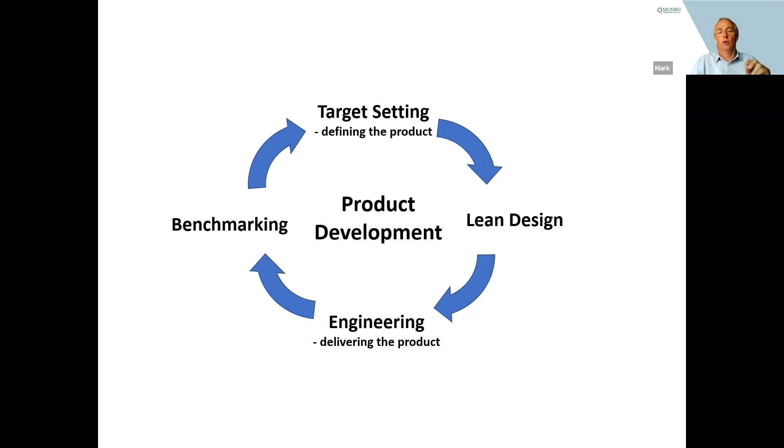So I like to think that lean design and benchmarking contribute to better forms of both. It's very important that we see these as part of the integrated activity for engineering and product development. The lean design aspect, in whatever form you take it, and the benchmarking, however you do it, are very important to being successful product development companies.

There's lots of influences on how you might do both - outside influences and internal influences that mean you're better or find it harder to achieve these things. For benchmarking, obviously availability of competitor products is sometimes an issue. And I think in one of our last sessions, we talked about how low volume, high cost products like jet engines and things like that are fairly hard to benchmark because there's no availability to you as a benchmarking agent.

So the thing to remember in this kind of environment is that you can benchmark other industries, looking for other technologies and other materials that can help you. You may not directly look at your competition, but you can look at the engineering environment to help you produce a better product.

So the thing to remember out of this is what you're going to get out of benchmarking. You're looking for knowledge and understanding. It's not copying, it's knowledge and understanding, because you have to know how to apply the information that you develop. And lean design is about an elegant design and a profitable business case.

An elegant design can be anything really, but it's how the design fits the business. So we might be talking less about style and how good it looks, and more about how easy it is to produce, how many parts are in the product, and what effect it has in the factory. Is it easy to put together? Those kind of things. And then over that is, can you turn a profit on the product you're manufacturing?

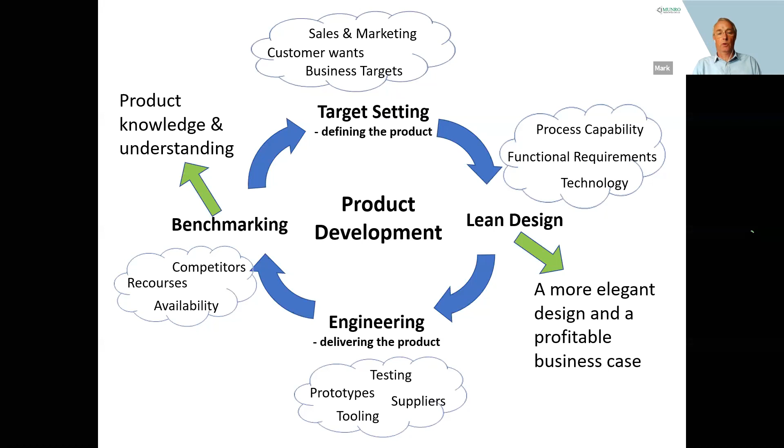So this is trying to set the scene for you where benchmarking and lean design fits in a product development company. So benchmarking is really about understanding your relative position to your competition. It lets you know where you are and how competitive you are, not just in terms of how many sales you have, but how many parts you use, what technologies you use, those kind of things, how you're manufacturing.

This then allows you to identify targets for your new product development. You must know where you're going to. I find I'm in a company where the engineers don't have defined targets for their own system. There might be, say, if we're in automotive, a vehicle level target for weight, but there's no engine specific weight target. So it's very important that you give engineers a target to develop to.

Benchmarking also helps you find new processes and new materials. And as I said, it's often beneficial to look outside of your own industry for those things.

It also helps you understand the business case of the competition. Quite often we find that you're competing with a competitor who may be a larger organization. And if you follow what they do, you'll end up in trouble, because maybe they have high levels of vertical integration in their business, which means they can use products from other business units to support their delivery, things that you can't do. So you have to understand what other people are doing and then find a way to compete.

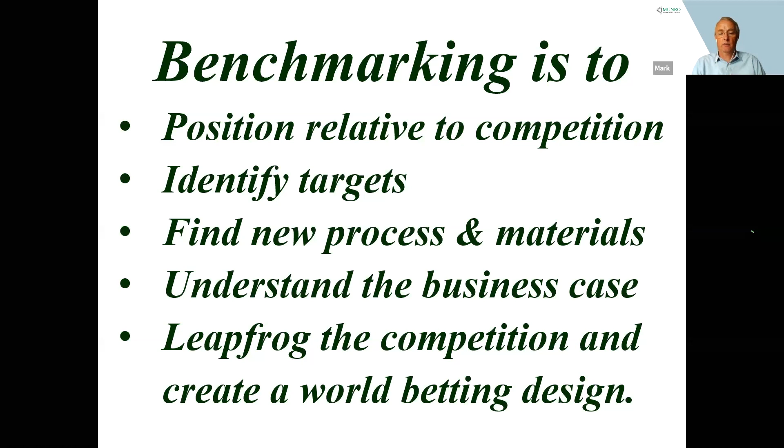So benchmarking, as I've said, is understanding and preparation for innovation. This is what I really like to get. You can't just look and copy. You have to look and innovate. That's how you challenge the marketplace.

Benchmarking, of course, is also the detail of taking a product to pieces. And the thing to note here is, if you can, you need to get hands-on knowledge to truly understand. So we always work to try and get the engineering team to do the disassembly wherever possible. Sometimes it's a secondary department that does it, but it's always good to get engineers into the benchmarking and teardown center to do their own investigation of products.

And finally, you must disseminate the information. It's no good writing a report if nobody sees it. So you have to find ways of getting the teardown benchmarking information into the hands of the engineers. And I've said the best way is to get them to do the job. Other than that, you must actively go out and push the information to your engineering teams. And that's helped by having better targets, because if they're under pressure to deliver on a target, they will often look for different ways of doing it.

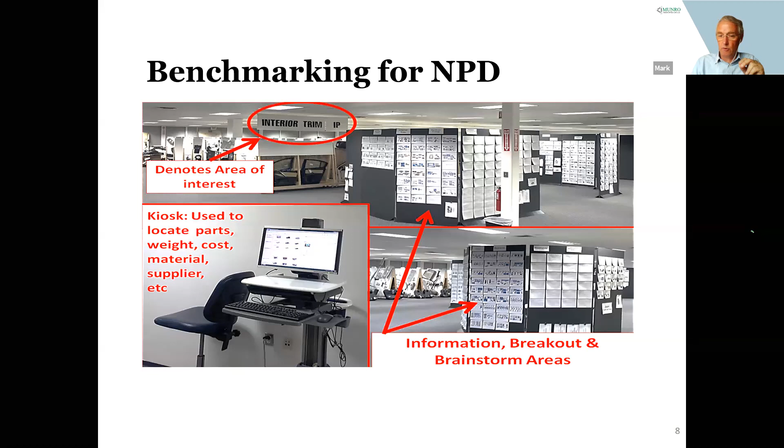So that's benchmarking, the key features that you really need to implement if you're going to be successful and use the benchmarking ideas and tools to their best effect. One of the things I wanted to illustrate, a long time ago now, we did a study on a Toyota Matrix, and it was interesting at its time, but the example I wanted to give you tonight was the fact that we looked at how many fasteners they had in the car.

Something you may not look at when you approach a vehicle and you're looking for technology, but it's an important measure in terms of engineering. It's an important measure in terms of business, because of all the effects it has on manufacturing, in terms of just tightening bolts, just looking at it, simple as that.

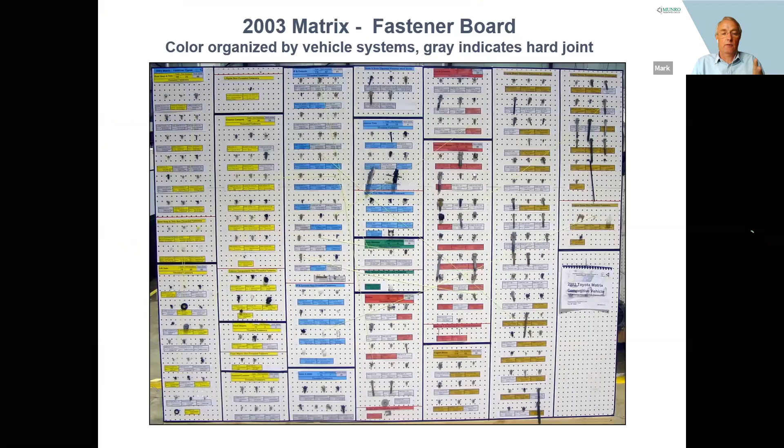So we set up these boards. We pinned every fastener we found to a board and checked it wasn't duplicated elsewhere. What we found is almost 1,000 fasteners in this car for the major components. But an interesting fact is there are 270 different types of fastener, so very little commonality across fastener types, and a lot of individual fasteners. If you notice the lift gate, there are 24 different types of fastener, and 21 of those 24 are unique - one-off to that particular system.

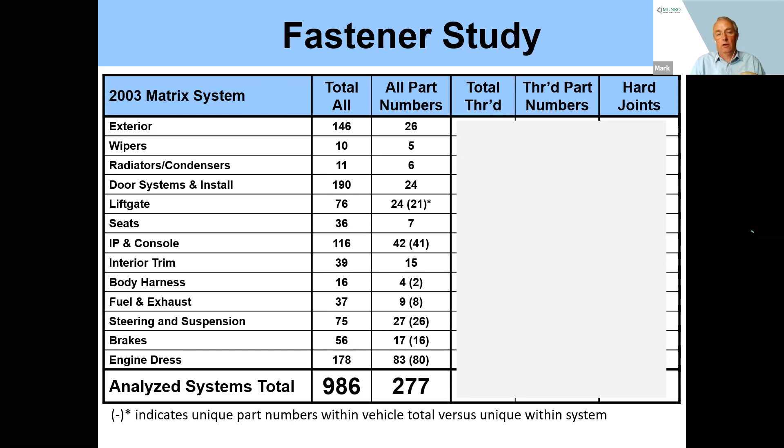So how is that? Is that good engineering or poor engineering? For my mind, it's something that can be improved. You may see a different side of it. I wanted to point out what we thought was the learning point from this, and what I still take as the learning point.

Toyota buys quality fasteners. Each one of those items was properly made and without fault - a quality bolt, if you like. The other thing to note is they are very, very good at adhering to process standards. So each bolt, when torque tightened, is all tightened to the same level and degree - very high adherence to process capability there.

The bad point, as I've just made, is a variety of fasteners, a big variety, and a lot of individual fasteners in the count. That's the good and the bad. The learning point is Toyota is very, very good at some things, but they can still improve. Just imagine how powerful it would be if they could get control of the variety and number of fasteners on their product.

So I wanted to say, looking at fasteners at the very bottom of the pyramid, in terms of benchmarking, very specific notes I've given you in there. I wanted, if I can, to just try and illustrate that with a couple of minutes from a video.

I think some people are aware that Sandy Munro, the founder of our company, does a lot of videos explaining our teardown activities, what's going on. I wanted to pick a couple of minutes out of this just to allow you to see how that goes, but I wanted to take it to a much higher level. So it's okay to look at fasteners and gather numbers on that, but at some point you have to bring the engineering activity up to a system level so that you understand how saving fasteners and changing the design actually works.

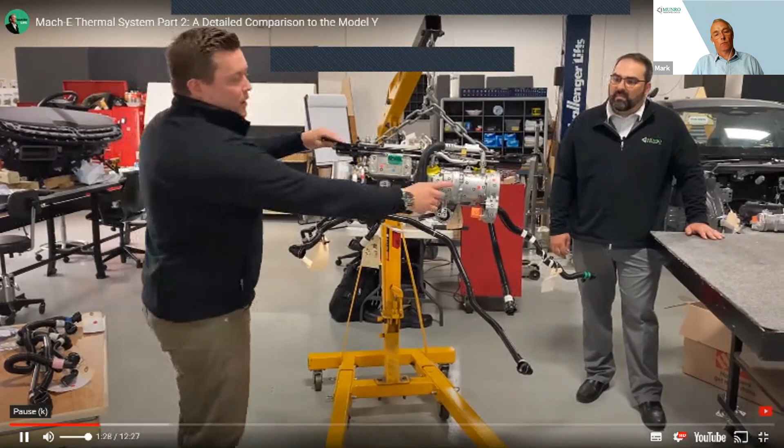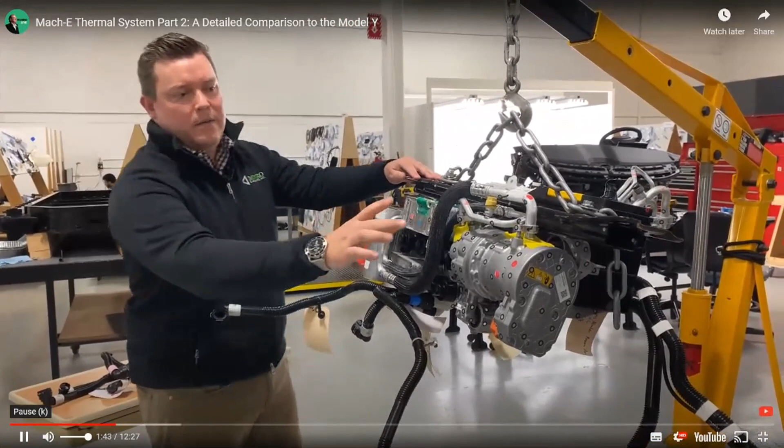So this is the Tesla Model Y thermal system, which is a unit we benchmarked a while ago. It's interesting to compare that with the newly introduced Ford Mach-E, the same system, the thermal system. Bring the corresponding pieces and parts that we found on the Mach-E, put them on the table, and then compare and contrast the hoses and lines that run between them. Right here is the R1234YF pump - notice it's hanging off of this cross-car bracket from the Tesla Model Y. Tesla chose a steel bracket to go across, Ford chose an aluminum one. But as we look at how things are mounted, how they're isolated, and the distances apart, we can see that Tesla focused heavily on getting everything as close together as possible.

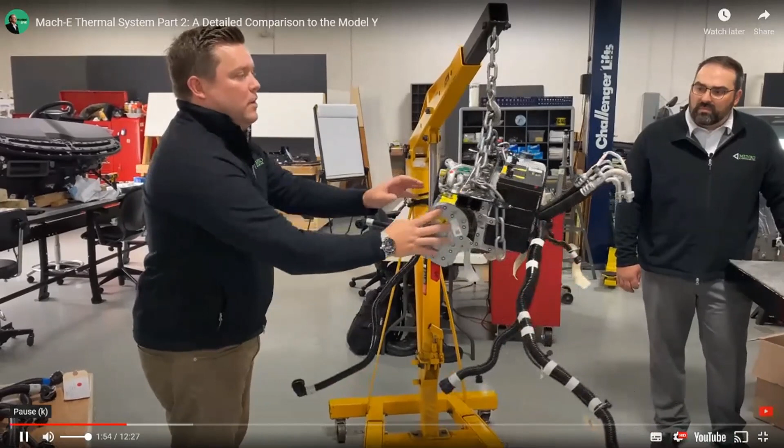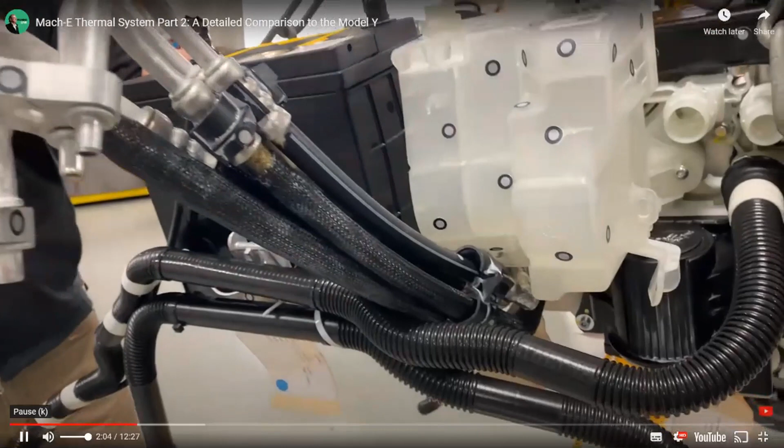If you look at the back, because this is a heat pump system, the lines run in an exact straight line. When comparing and contrasting to the Ford Mustang Mach-E, you'll notice that the lines are not nearly as concise.

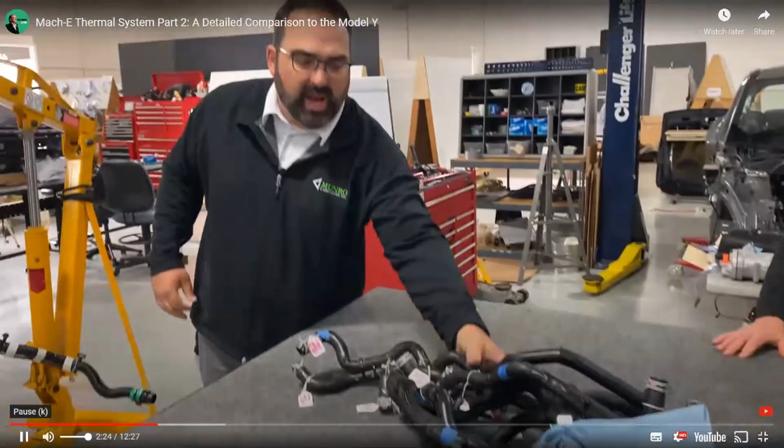So Ben, do you want to go ahead and grab the first component to compare, and we can talk through the differences? All right, well, first we're going to grab all the lines that the Mach-E has, which is, as you can see, a whole bunch of lines when compared to what the Tesla Model Y had. There's actually 35 different hoses here, which is a very large number when looking at the thermal system.

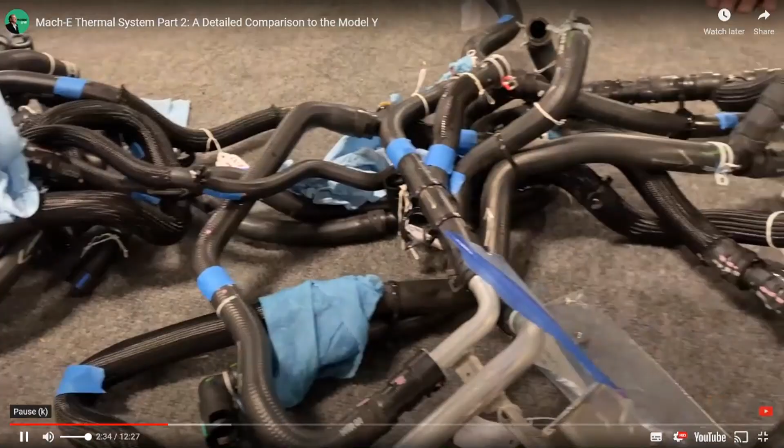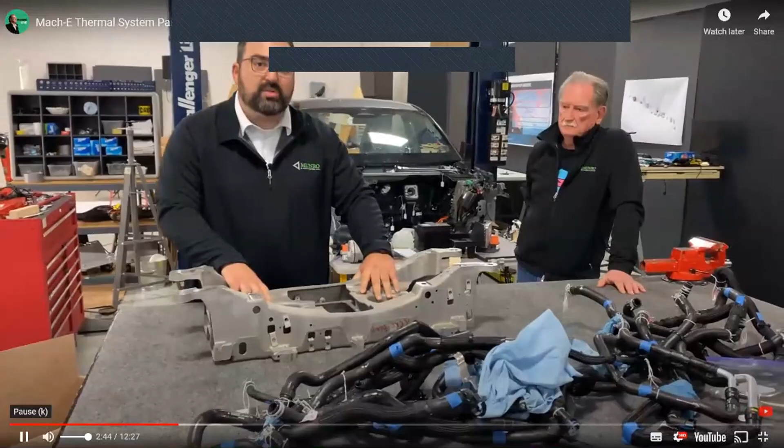And then pulling out a few of the other parts that Corey had just talked about, we'll start with the bracket that they're using for mounting most of this. This is the crosscar beam. This also holds the motor up as well as the electronics. So Ford is doing more than just the thermal systems with this component.

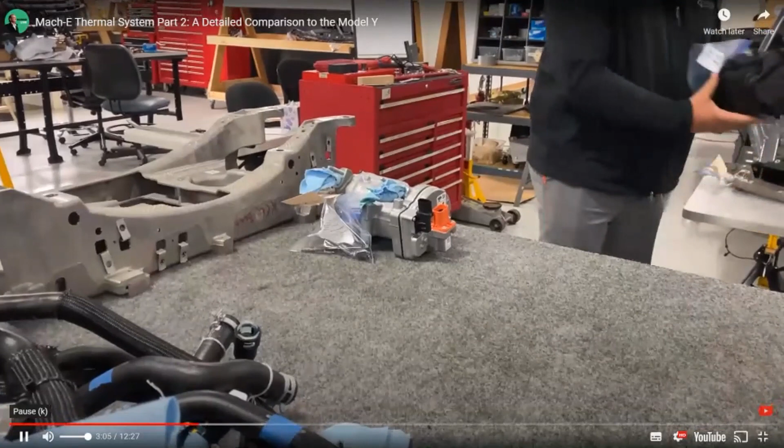So it is much larger than what it needs to be, but it would be the equivalent part in the Mach-E. And then we also have the compressor that the Mach-E is using, but it's not mounted just like that. There is a noise isolating diaper that goes around it, and they have a bracket and then an isolator to hold it in place. So there's a lot more that's happening with these parts.

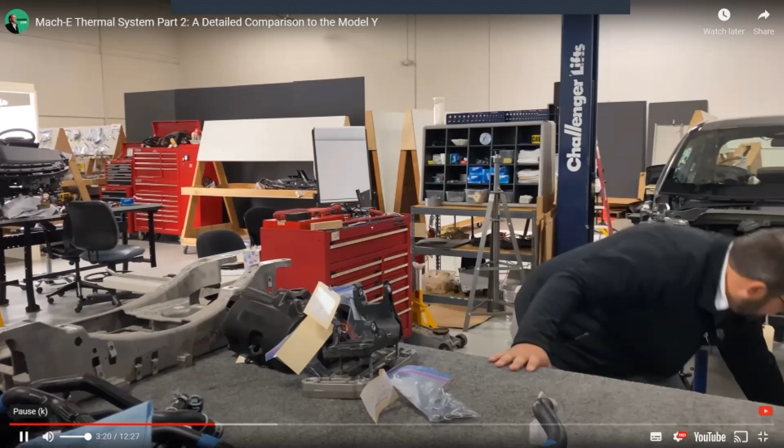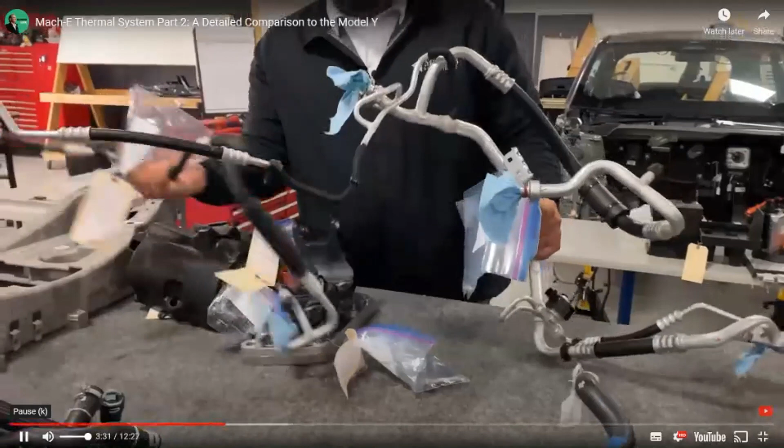And then Corey also mentioned the refrigerant lines there and how they were very straight and to the point with their design. These are very turned, they're very bent, not a straight line ran here, so they have to wrap around parts to get to where they need to be.

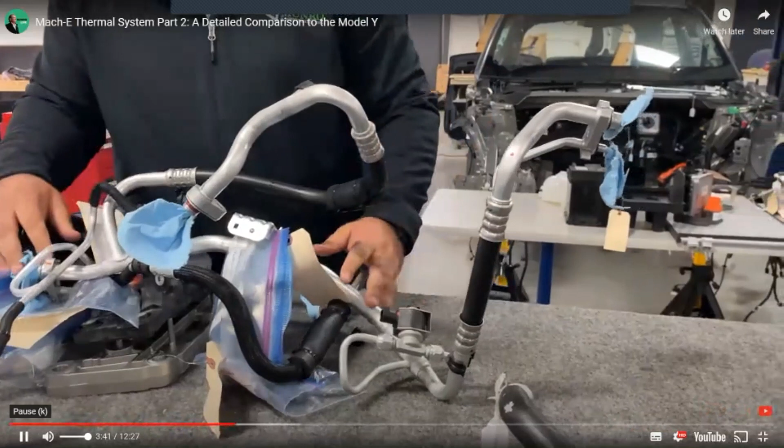I'm hoping I'm picking the right screen. Here we go. So hopefully I'm back to the presentation for everyone. Yeah, yes, Mark. So, yeah.

Thank you. So that's an illustration of how when you do the benchmarking across systems, you can see immediate difference between the Tesla and the Ford. Why they ended up like that is open to speculation, but it's probably because Ford didn't look at the Tesla system in terms of benchmarking, and they looked at other systems.

When we've noted between vehicles like the Tesla and the Ford Mach-E, some areas are truly fantastic on each car, but nobody does everything really well. And so it's important to note that Ford was still designing here a distributed system across the car when Tesla had already shown another way of doing it.

So interesting point, but just to get you, there's the Tesla system. And here's everything that was equivalent on the Ford Mach-E. Now, you might say, well, Ford had to live with other constraints, maybe different sets of suppliers who did something. Maybe they were carrying over a lot of parts and wanted to reuse those from their parts supply bin, that kind of thing.

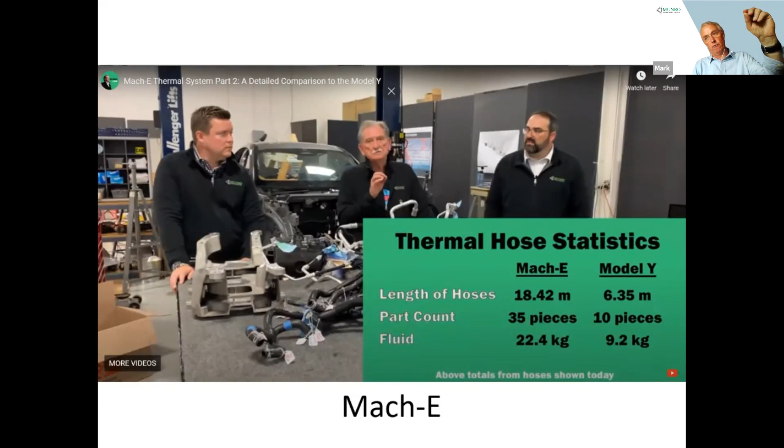So you're having a detrimental effect. And if every system is like that, then you start to see a vast deterioration in range on the vehicle. And that's something the customer doesn't like. So, the weight here, whether it be the weight of the fluid or the weight of the parts or the number of brackets, is a very important thing to understand when you're benchmarking. So we go from the detail right to the high level of vehicle target setting in that regard.

So switching to lean design, how does this play together? Lean design is about changing the rules, changing the engineer's mindset. You want the engineer to think a bit differently, to see a bit differently about the design, and also to implement a different design. In my experience, within a company the engineer gets constrained by faster delivery times and things like that, and reusing supplier parts.

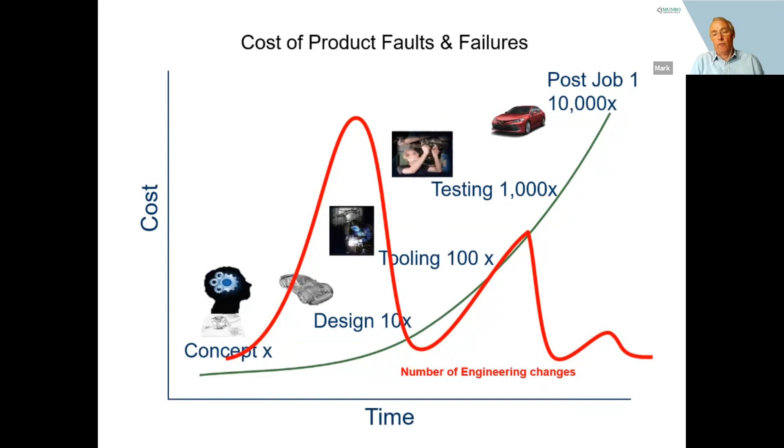And then it'll ramp up quite significantly when we get to testing and we find test failures or parts that don't fit and things like that. Then it drops off again, and hopefully we don't see it, but sometimes you do. You see failures in the field with the customer, and that's really expensive. So this is an important thing to note, where the failures are occurring.

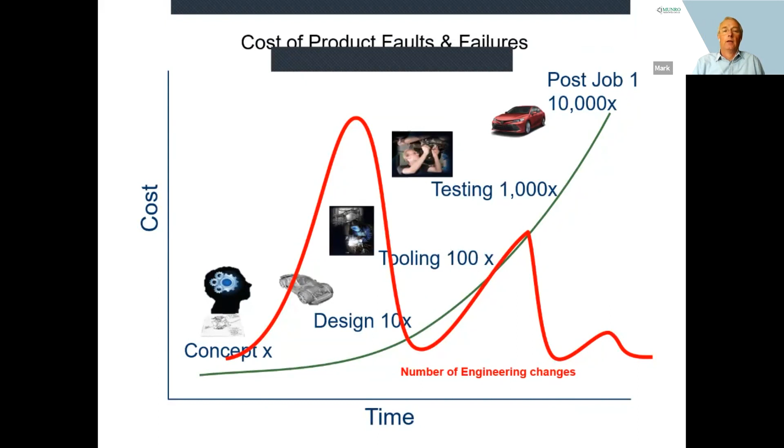The question we should be asking is when can product design be most influential on this? That is, how can we reduce the number of failures we've got? And it's fairly obvious to say that this is early in the design phase. The earlier we can get in and fix those problems, the better off we're doing. But actually, you're only fixing problems that cost you money downstream. You're not actually changing the business case of the product necessarily.

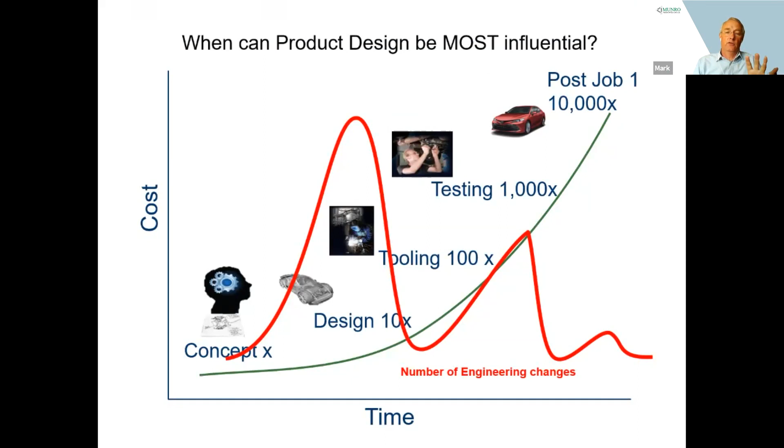This is where lean design differs in some respect, because actually lean design is influencing the profit you make, not just taking away failures, but influencing how much money you're going to make on a product. This is where we talk about the influence of the product design engineer, not the fact that we're maybe working with suppliers to reduce cost, or working with labor, or changing the factory to reduce cost. It's how the engineer influences all the downstream costs in the process through the decisions that they make.

If we can make the engineer make better decisions, more business orientated decisions, then we're really going to make money on a product, and not just have what I typically see as a very functional product, one that does the job but doesn't necessarily fit the business case or deliver the targets.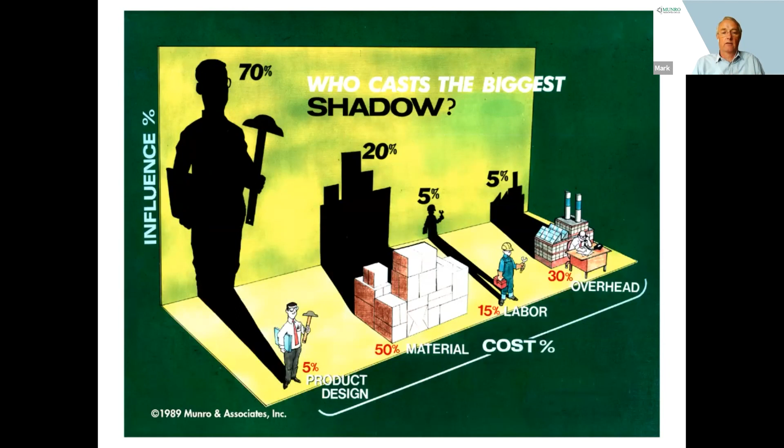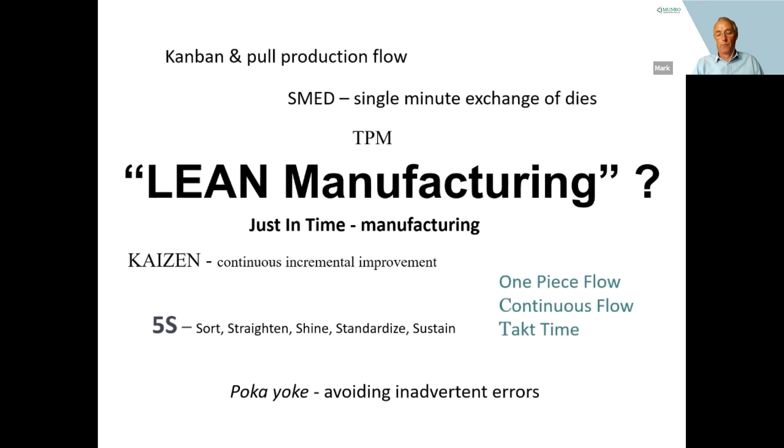So everybody knows about lean manufacturing today. It's well instigated in manufacturing businesses. And there's lots of processes that you can implement and tools and techniques that you can use to deliver lean manufacturing. But one of the important things is waste. Lean is all about the reduction of waste from a system.

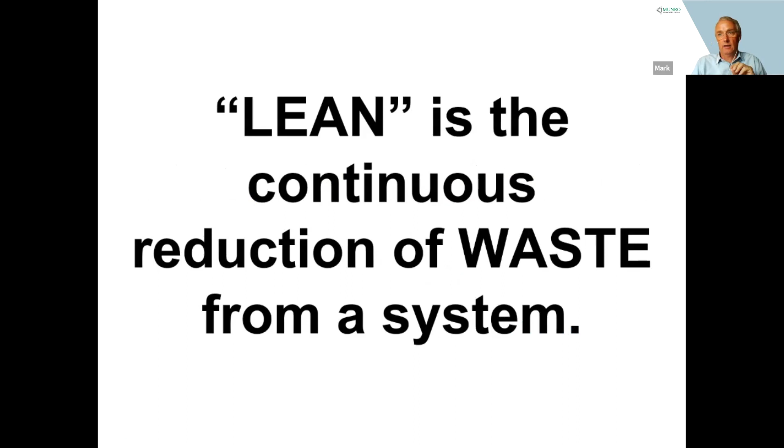So I've been thinking and constantly trying to refine the idea: what's waste in terms of lean design? In engineering terms, where's the waste in what the engineer does? And I've been thinking about this. So the first couple, very closely associated: over-specification of requirements, tight tolerances, and extra processes for manufacturing. If there are things you can do to refine that, then of course you're making a better business case.

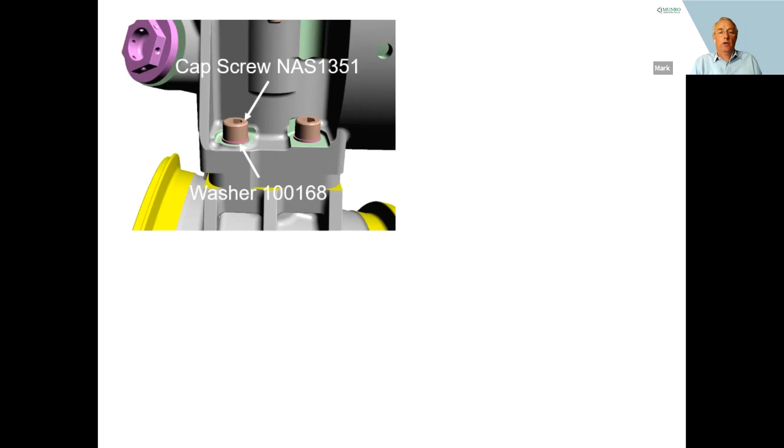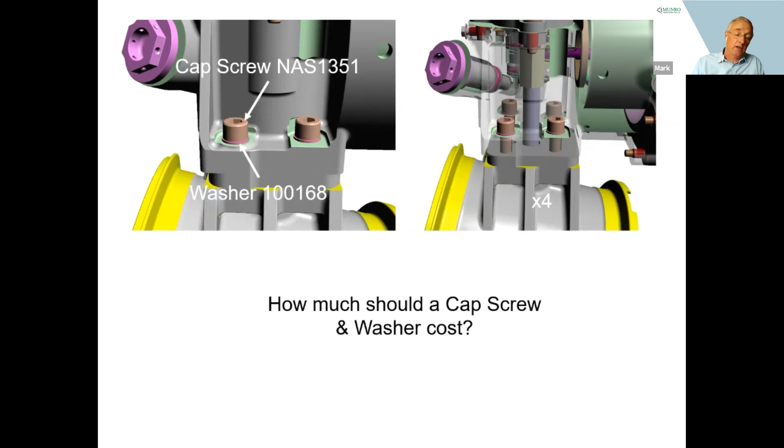Just a very simple example. Here's a cap screw and a washer. They're quite innocent parts, there's no particular science about using it, we're just trying to bolt two parts together. Actually, there's 4 parts in here, and you have to say that's fine, that's standard engineering. How much would you expect the cap screw and the washer to cost? And until you start saying, well, it's functional, but how much is it costing my product? This is when we start to open our eyes.

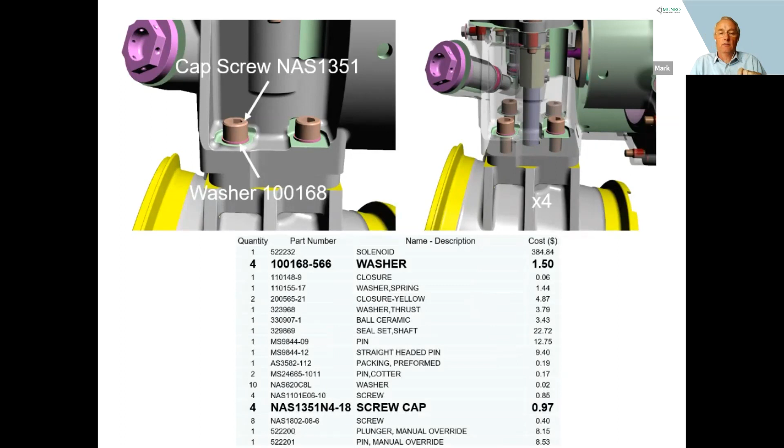And you see here that the washer costs $1.50 and the cap screw costs 97 cents. Not very standard prices for relatively standard parts. When we get into it, the cap screw is a fairly standard part, but it's for the industry, it's a fairly high strength bolt.

The washer is the interesting bit because it's actually specified to 4 decimal places of flatness or thickness. So it's a really highly constrained part. That's where the money comes from. It's probably got ground surfaces on both sides, totally unnecessary for the requirement of the job it's doing.

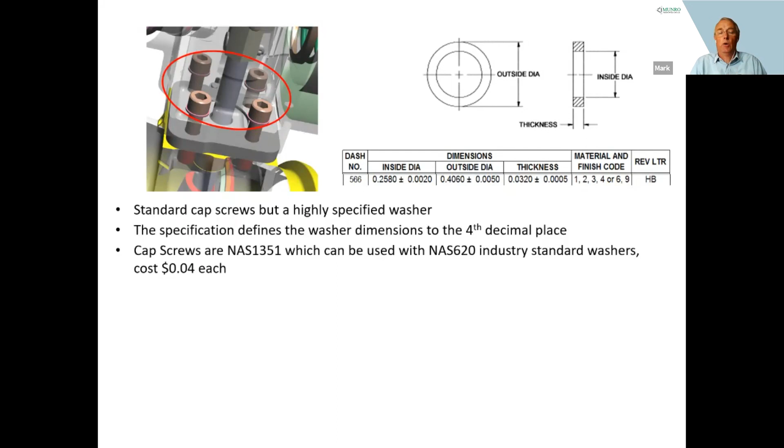And there's a simple saving here. You may say, well Mark, that's very detailed, but it's only saving $5 on a $1,500, $2,000 piece of kit. Well, you have to look at the detail to start building up. And you ask yourself, why does the engineer use such an expensive bit? It's generally because it's standard or it's been used before in their industry.

So you have to shine a light. You have to ask the engineer to think differently about the job that washer's doing and what its requirements were. There's no particular flatness on the casting surface that's machined, and there's no particular flatness under the head of the bolt. So why would you put such a highly specified part in there when a cheaper one would do? That's over-specification of tolerances and requirements there.

There's other things like long supply chains. I've met several components that have done 24,000 miles before they've actually hit the assembly line in terms of being prepared and machined and manufactured. Is there an opportunity to reduce that sort of thing?

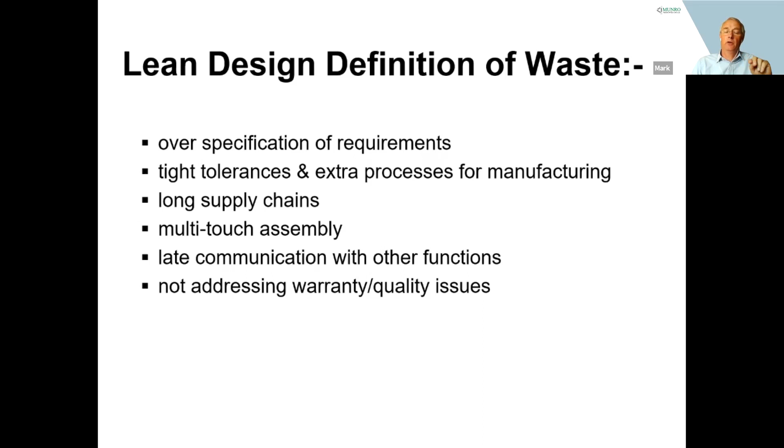Multi-touch assembly, where parts are assembled and then disassembled and touched again - I'm sure you're very familiar with that kind of thing. Late communication between functions, poor communication between functions, often costs you a lot of money.

One of the worst things I see, or one of the most obvious things I see, is quality and warranty issues. Just because that information isn't fed back to the engineering team, I see that faults and failures occur in every introduction of the new product. It's always there because the information is not fed back to the beginning of the loop. So these are forms of waste as I see it.

There's 2 more that I wanted to illustrate: unnecessary parts and stifled innovation - waste of the human mind, if you like.

Here's a very obvious change. Unnecessary parts on the left, a refined design, shall we say, on the right. It's easy to see how you could make that change and come up with a suitable product. The problem is if you didn't implement it.

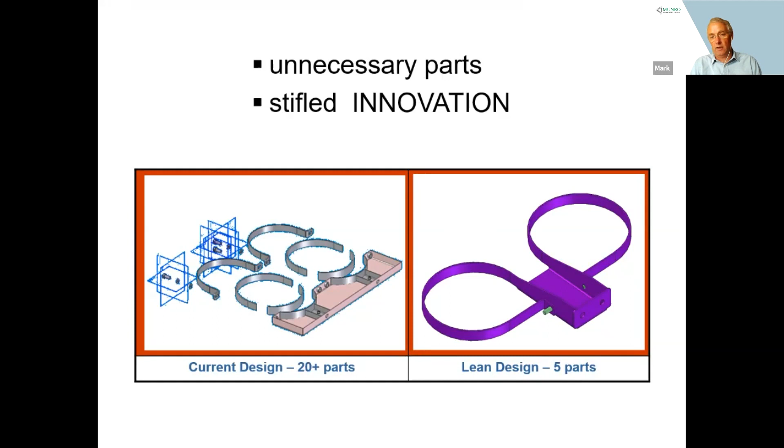And this is a catch-all to all management: if you're going to do some lean design, use the outcome of that product. It's a source of dismay to me if we have an engineering team working hard to come up with new designs if they don't get implemented. So a word of warning to some.

So we train the engineers and we do workshops on site mainly. We've been doing some web-based activities to try and work through the pandemic. It's very hard when you work with distributed teams that may go all the way from Europe to the far side of America and that kind of thing.

So it's hard work, but we train in the lean design process and we deliver workshops to make sure the engineers are doing the right thing on a product. It takes 1 or 2 goes at this before the engineers are self-motivated and doing their own lean design on the product. So I'm training the engineers to think about things differently.

And I want them to understand that they are the ones that create profitable products. So it's not just a functioning product they have to do, but they have to use the targets that have been set to create a product that delivers for the customer and one that also delivers for the business in terms of its business case.

Just mentioned working to targets. Those targets have to be detailed and specific to all the engineering teams, not just at a platform level or a whole product level. They have to be broken down so that specific engineers know they have a task. Otherwise, the engineering community tends to pass those tasks around and they never get delivered on.

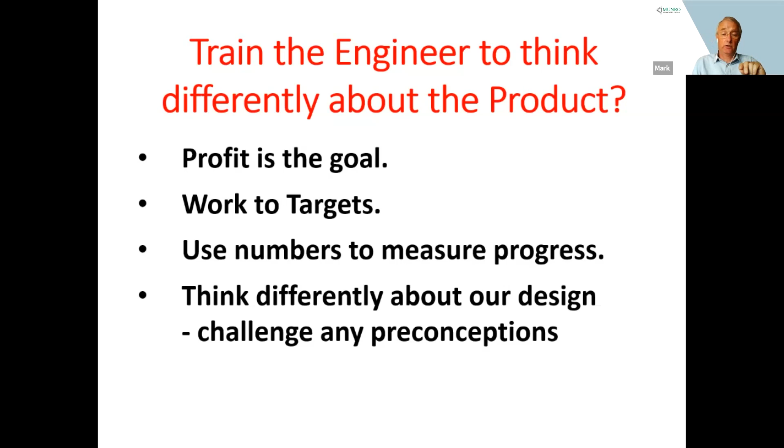Those kind of things all come into play, so numbers prove a case. Think differently about the design, challenge your preconceptions. The conceptions I find are often out of date rules and regulations, or unsubstantiated evidence about customer requirements and things like that. So always make sure that when the design is in a lean design environment, we're operating to the latest information on requirements, and we're always looking to find the waste in the design. That's the key to doing this.

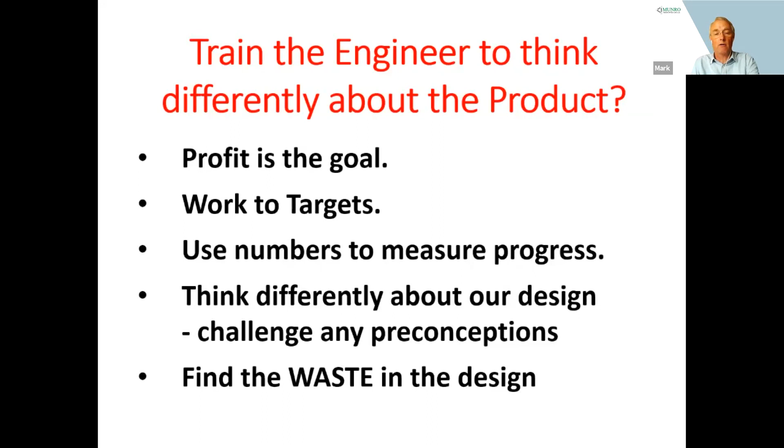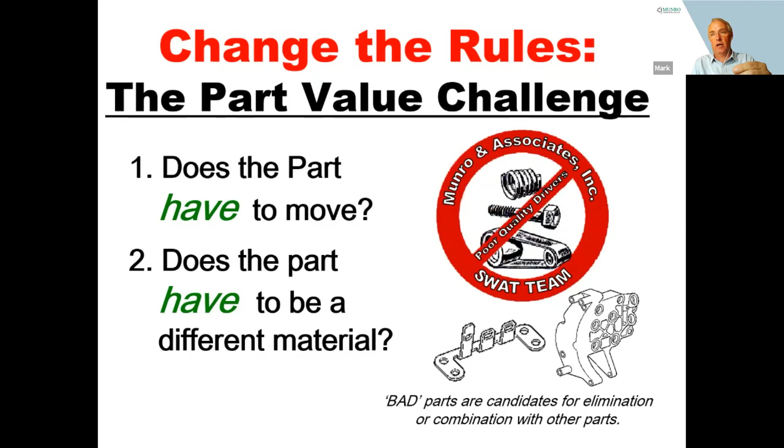Now, that's how I train the engineer, but there's a refinement to this, a lower level of detail, which allows the engineer to operate when looking at the parts they're designing. So two key things we like to talk about are minimizing the part count and considering assembly while designing. We have simple tricks to play. We have a part value challenge, which focuses the engineer's mind on asking: can I integrate components? I may need the function, but do I need separate parts to deliver it? So we ask the engineer to look at all the components and see if they can integrate parts together without removing any function.

And we also have some good design principles for assembly. Correlating to the last point is minimizing the number of parts. Obviously, if you reduce the number of parts, you have a shorter assembly line. Use gravity, don't fight it. If we can make a bottom-up assembly, something we can just pile up, that's the most efficient process we can have. Designing like that takes people a long time to understand, fitting parts in a layered fashion that builds up.

The other thing I like to point out is questioning serviceability on a product. The customer always likes reliability, not serviceability. So I often have to coach the engineering teams around the idea of what needs to be reliable as opposed to what is disassemblable because it's serviceable. There's a slight difference.

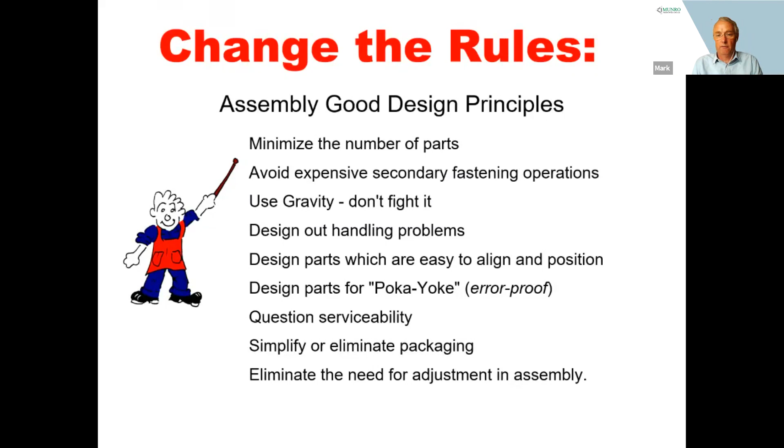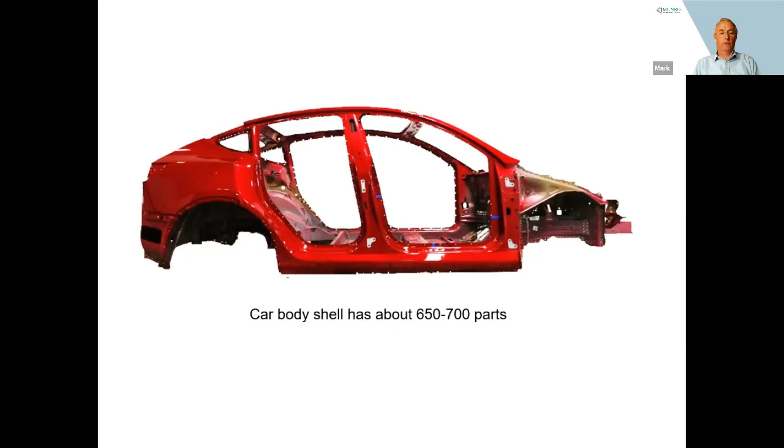When we got hold of our first Tesla vehicle, the big criticism that came out immediately was the fit and finish of the panels. There was lots of variability and gaps across the vehicle, particularly at the rear end. Our conclusion was that they had no build capability, no process capability in terms of how they were building the body shell. I'll note that other parts of the car are absolutely fabulous - the electronics they'd instigated, they'd clearly spent their time designing those bits and not so much on the body shell. But in terms of customer perception, those are the things that grab your attention from the outside of the car, things you wouldn't find on other brands of vehicle where quality is premium.

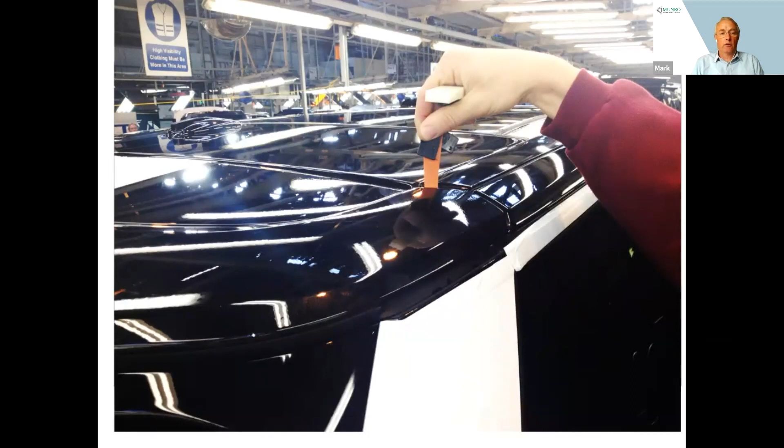So gapping was variable across the whole car, front to back, side to side. The reason for this, as I've alluded to, is that they had lots and lots of body panels and they didn't control the build-up. So we criticized them heavily for that. And just to say, there's no actual relationship between Tesla and Munro.

We just took the product and started looking at it because it was probably the first easily available high volume production electric vehicle, and it was interesting to do that. As I said, one of the good things about Tesla as a company is how quick they are to respond to faults and flaws.

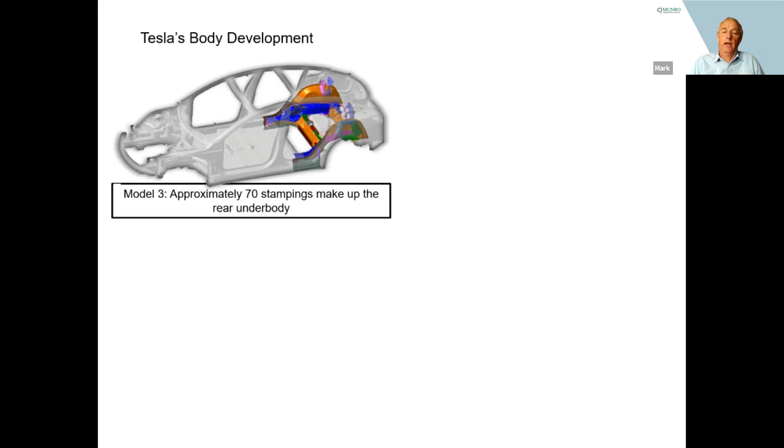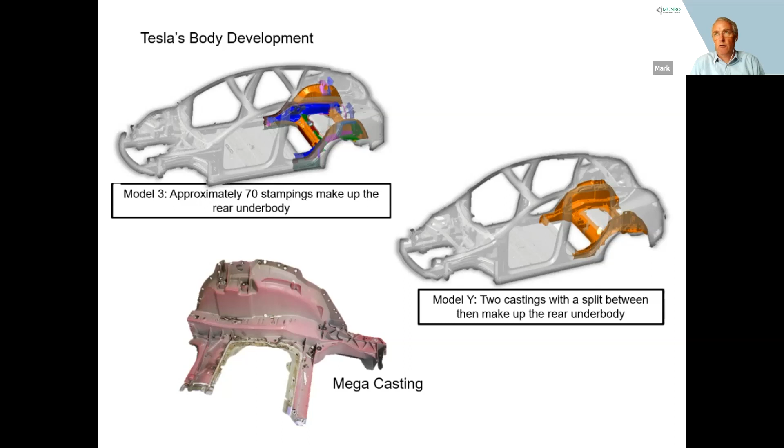So they immediately reacted to this, and on the next vehicle development they looked at all those rear body stampings, and they came up with a solution: a single piece casting, left and right. They replaced those 70 stampings with 2 die cast elements, and called it the mega casting. It was interesting when we saw that, perhaps a year or 18 months between the introduction, and they'd managed to get it in.

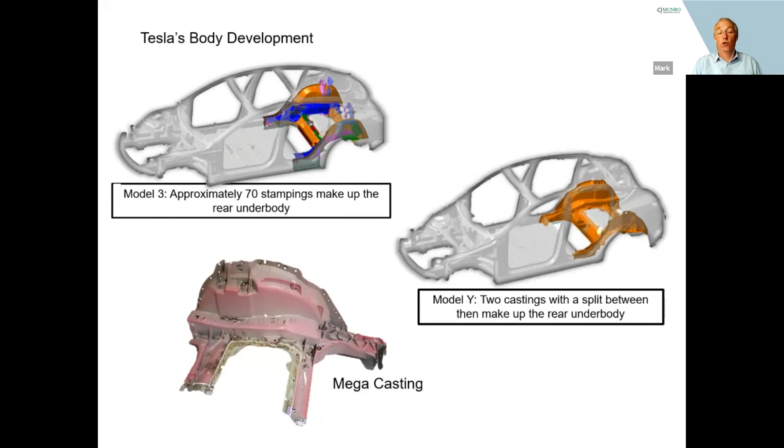Now Tesla are actually going further. Rather than having 2 castings, left and right hand side, they're talking about going even further. This is proof of the point here, if you like: as variation is reduced, quality will increase. The variation between all those 70 parts and their own particular tolerance stack up is blown away when you only have 2 parts on a high quality die casting.

And Dr. Deming was absolutely right when he said that, probably decades ago. This is just proof of it when you see it instigated in a design like that. The correlation to this is all variation stems from design. It's going back to how the designer thinks and what they're thinking about when they're doing the design. It can't just be a functional design anymore. It has to be one that suits all the requirements of the business, whether it be business case or manufacturing tolerance stack up.

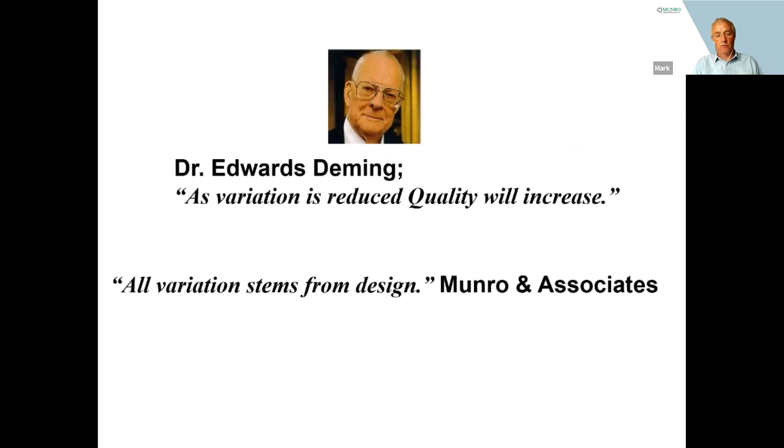The best design is the simplest one that works. This is something we like to hang on to because, in Munro terms, there's a correlation to that: the first design is never the simplest. That's something to hang on to, whether you're benchmarking or doing a lean design activity, is what have you got in front of you and how can you improve it? What have you got in front of you, and what are the measures you need to note to improve your design?

What have you got in front of you? How much does it cost? And how can I beat that? So always think of things in these terms: is that your first design? Is that the one you're going to take to market? Or is there a refinement process that you can go through?

Let me propose the formal vote of thanks for the day. First, I would like to thank Mark Limage for accepting our invitation and sparing his valuable time amidst his busy schedule. Thank you, Mark. I know how difficult it was to run a lean design workshop online, especially since it was the first time he was doing it, and it was a busy week for him, but somehow we were able to get him for this session.

We also record our sincere thanks to our mentor, Mr. N.R. sir, for his passion and commitment to work towards achieving the vision and mission set by ISQ. Thank you, sir, for accepting our invitation to be with us today, and your words of wisdom will be something we always want to have for all our programs.